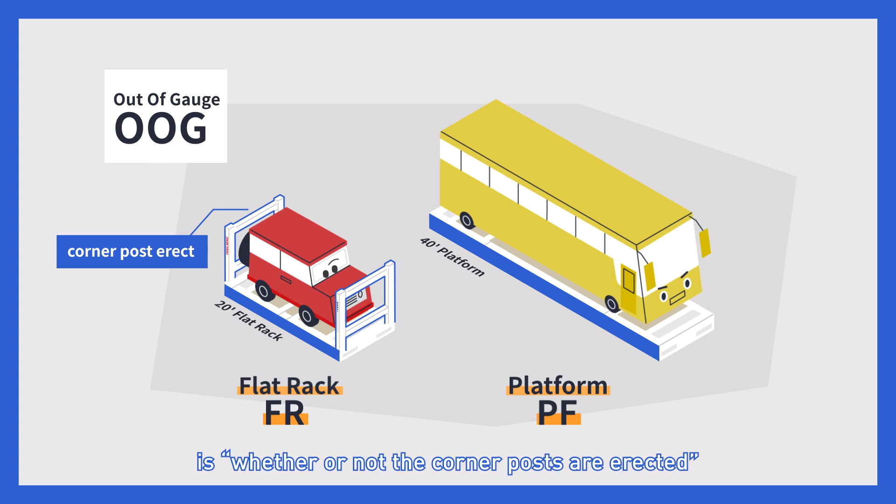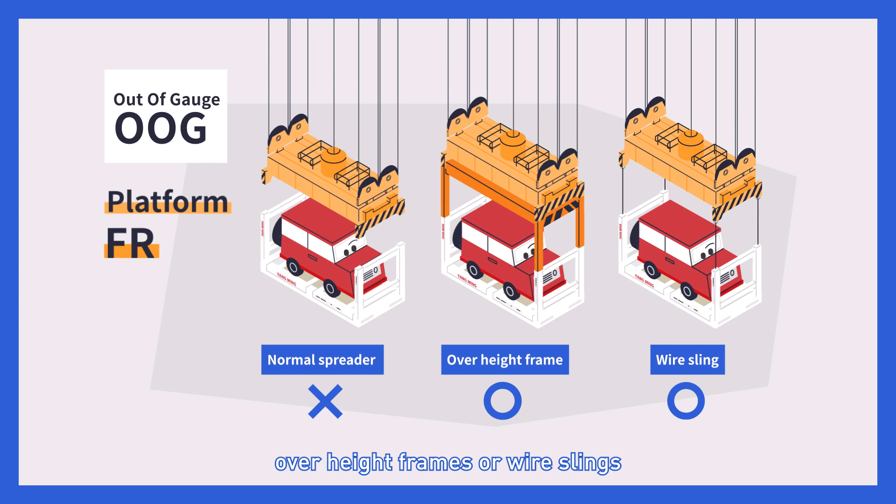These two containers are usually used for loading OOG cargo, since overheight cargo cannot be hung by normal spreaders. Overheight frames or wire slings are used for hanging this type of cargo. The rack in flat rack means shelf, which represents that the corner posts of the container are erected. The plat in platform suggests that it's flat, which represents that the corner posts are collapsed.

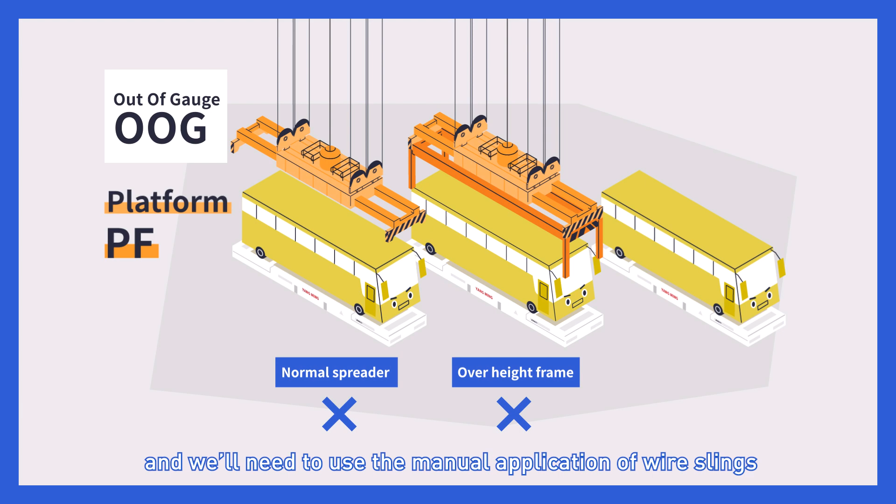In this situation, overheight frames cannot be used to hang the cargo, and we'll need to use the manual application of wire slings for hanging operations. Senior, there's something I don't understand. If using wire slings is troublesome, why are we still using platforms?

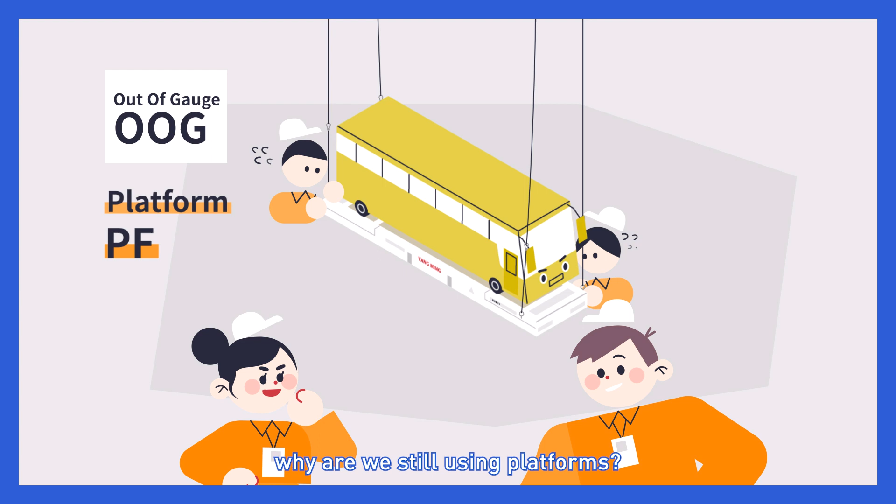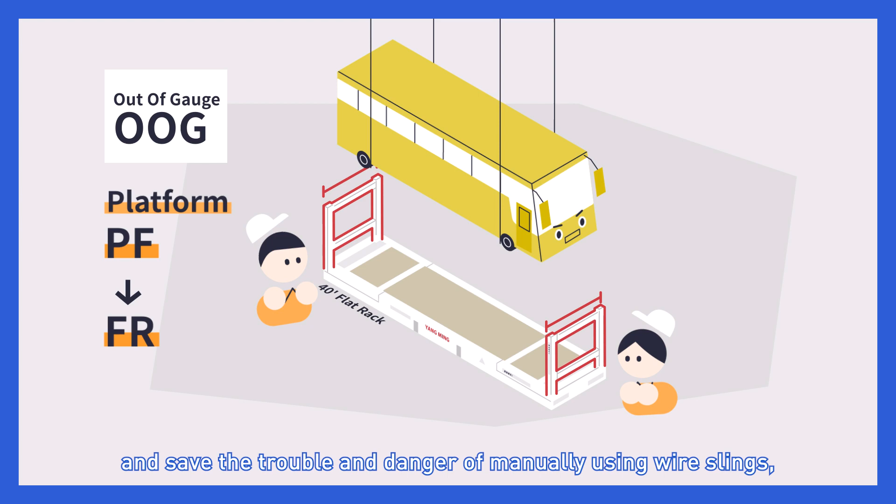Why don't we just erect all of the corner posts? Even though the erected corner posts allow us to use over-height frames for hanging and save the trouble and danger of manually using wire slings, the corner posts themselves take up space like a fence, and it will limit the dimension of the cargo. That's why the overlength cargo is not suitable for being loaded on the flat rack. It should be loaded on the platform instead.

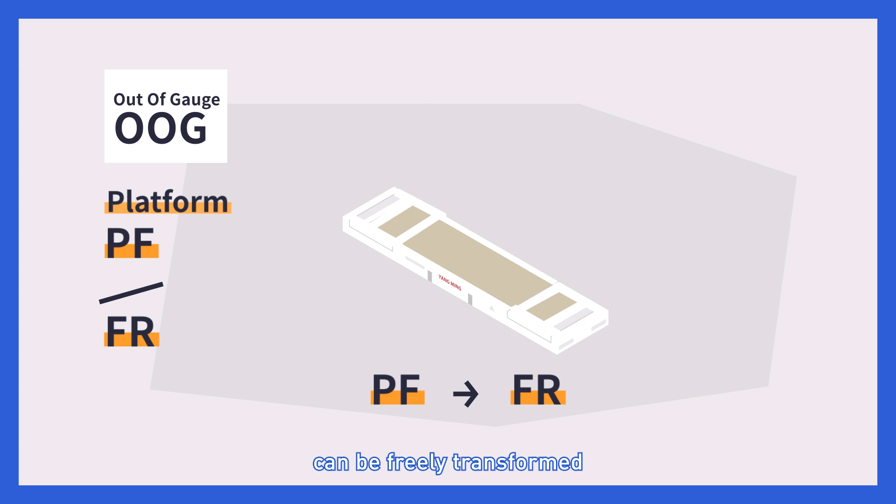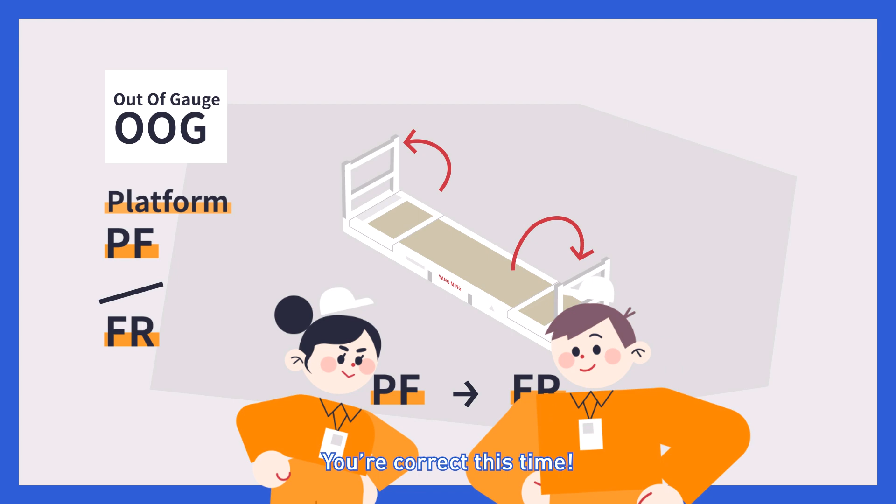By the way, Yang Ming's flat rack can be freely transformed into a platform or flat rack by folding the corner posts like this. Oh, it looks like a large foldable table in conference rooms. Exactly. You're correct this time. You really did a good job talking about the open top, flat rack, and platform for OOG cargo.

Thank you, Senior. I have to talk about them in detail so that our Yang Ming newcomers sitting in the audience can understand easier. The audience?

It's nothing. Anyways, let's talk about the other kind of cargo that cannot be loaded into general-purpose containers, which is BB cargo. When the dimension of the cargo is too huge or the weight is too heavy over the payload of a single container, not only can't you use general-purpose containers, but you also can't load as OOG. If one flat rack isn't enough, then put some of them together. This type of cargo is called BB cargo.

BB cargo will use multiple platforms or flat racks as base plates, as they must be hung separately. General-purpose containers, or OOG cargo, can use normal spreaders, over-height frames, or wire slings to simultaneously hang the containers and the cargo. The BB cargo and multiple base plates beneath the cargo can't be hung at the same time. Therefore, when BB cargo is being loaded or discharged, the base plates of the containers and cargo need to be hung separately. A suitable spreader should be used depending on the dimensions of the cargo.

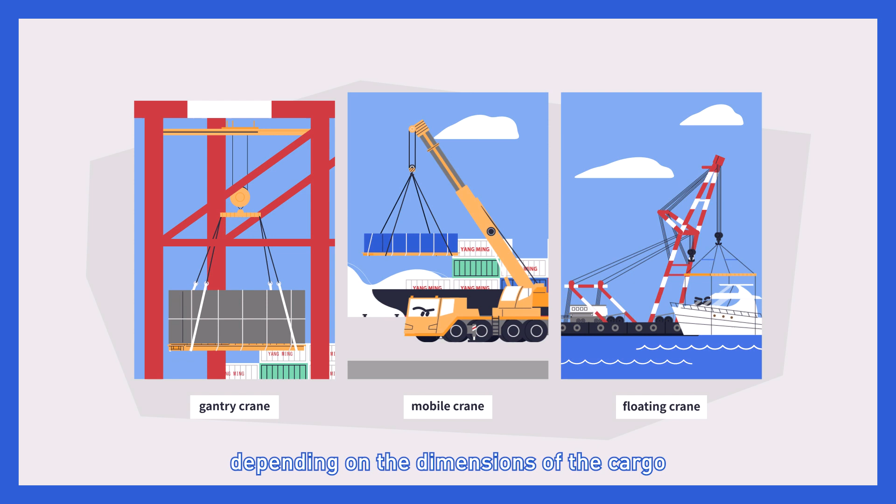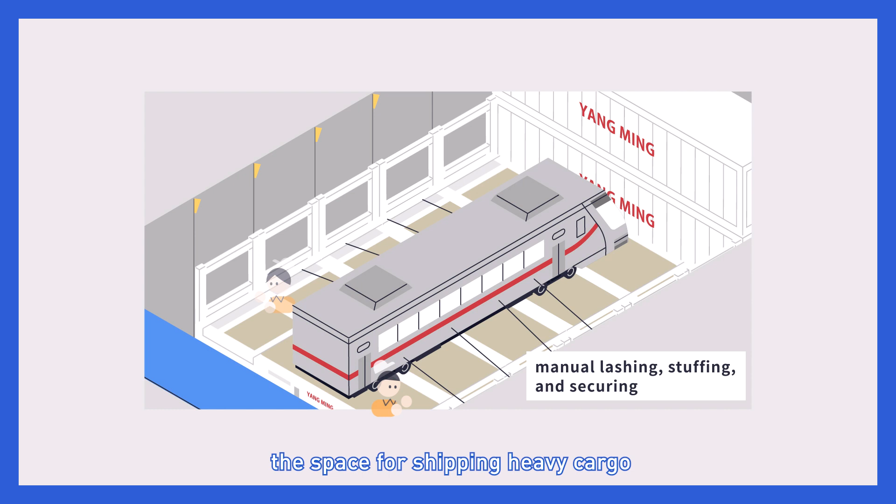Then, the BB cargo will be secured on the base plate after it is loaded onto the vessel, and the workers will secure the cargo. In short, the space for shipping heavy cargo also needs to be specially arranged, as they cannot be placed on top of general-purpose containers. That's finally all of it. I'll summarize everything one more time.

The two types of cargo that cannot be shipped using general-purpose containers are OOG cargo and BB cargo. The difference between the two is BB cargo needs multiple base plates due to being large and heavy. The cargo and container need to be hung separately. Only one container is needed for OOG cargo.

Based on the nature of the cargo, there are three types of containers to choose from: open-top containers, flat racks with erected corner posts, and platforms with non-erected corner posts. These three types of containers can be hung with over-height frames or wire slings. Not bad. Now, we'll talk about something more practical.

What does a Yangming container actually look like? What is the standard for over-height, over-width, or overweight cargo? What situations require additional expenses or result in the cargo being rejected? I'm not quite sure about that. You should come up and elaborate on that, Senior. Come on up. Dozo. Listen up.

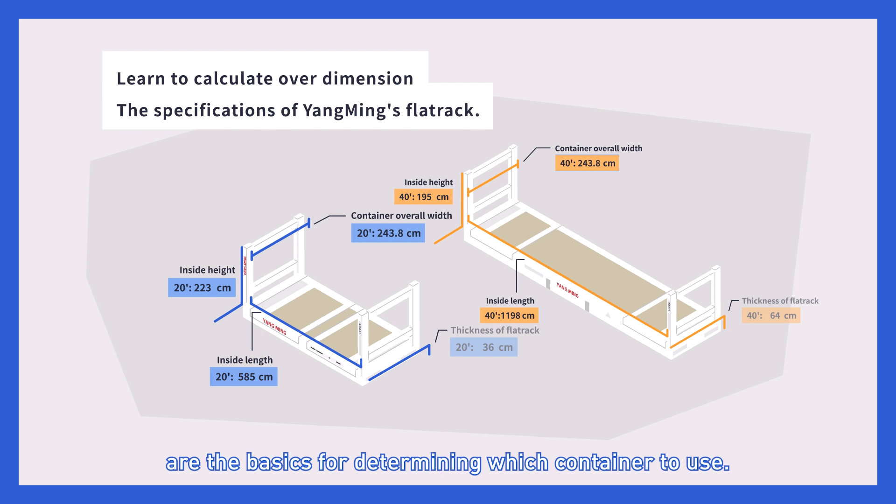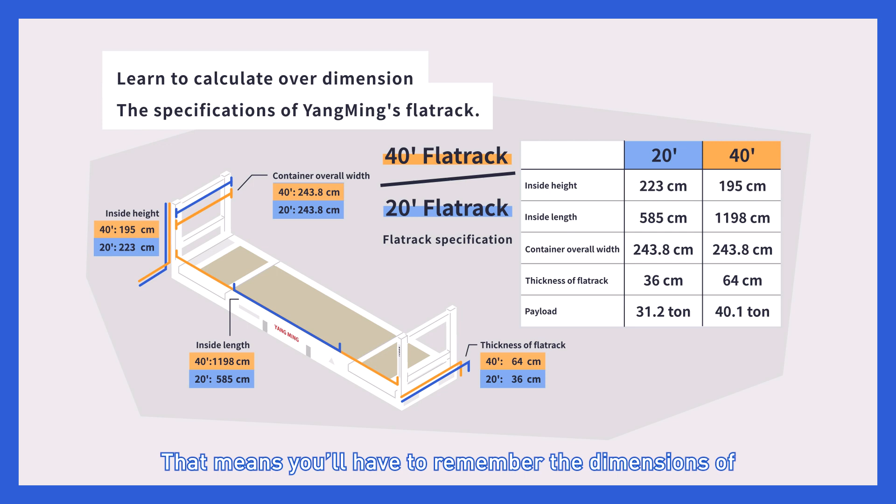The height, width, length, and payload are the basics for determining which container to use. Suppose you need to learn how to determine whether a cargo is over height, over width, or overweight. That means you'll have to remember the dimensions of Yangming containers. The external length of the base plate for Yang Ming Marine Transport's containers is divided into 20-foot and 40-foot.

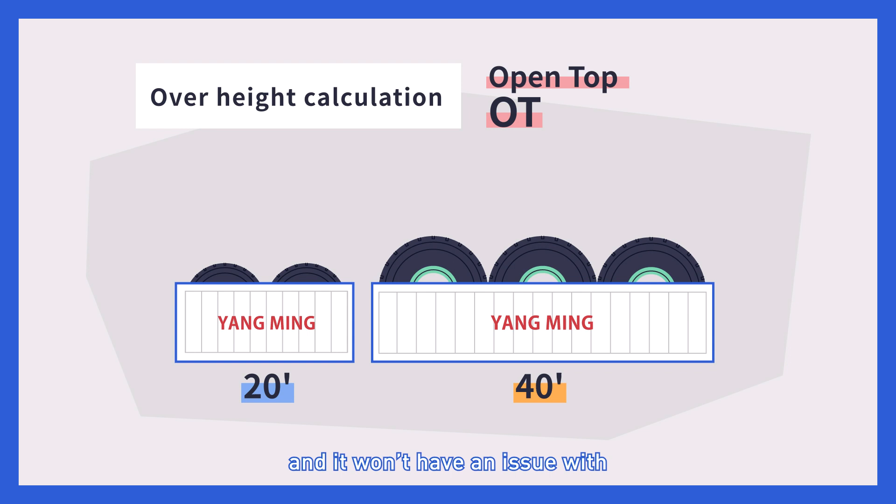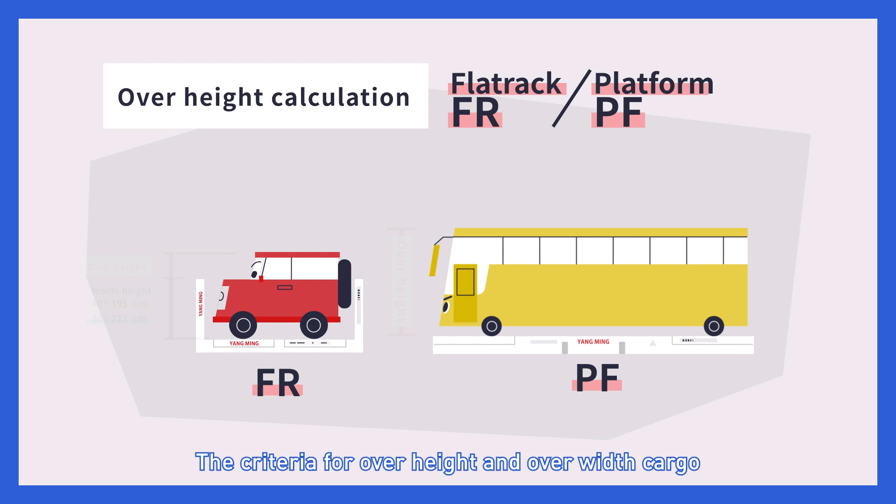If it is an open-top container, it will be enclosed with walls, and it won't have an issue with over-width cargo. The cargo is considered over height when the total height exceeds 234 centimeters. The criteria for over-height and over-width cargo for flat racks and platforms mainly depends on the actual loading dimensions inside the container.

The internal height of a 20-foot container is 223 centimeters, and the internal height of a 40-foot container is 195 centimeters. When the height of the cargo exceeds the internal height of the container, the cargo is over height. Senior, what about platforms?

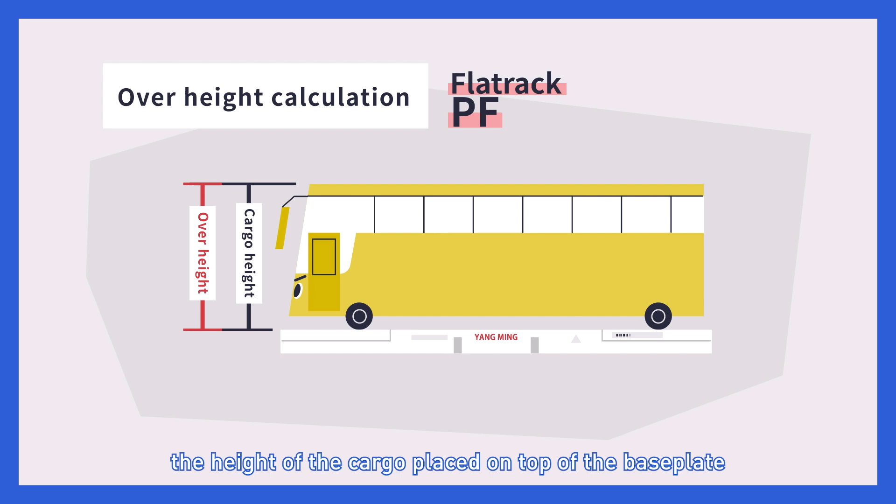Since platforms don't have erected corner posts, the height above the base plate counts as over height. Therefore, the height of the cargo placed on top of the base plate is how over height the cargo is.

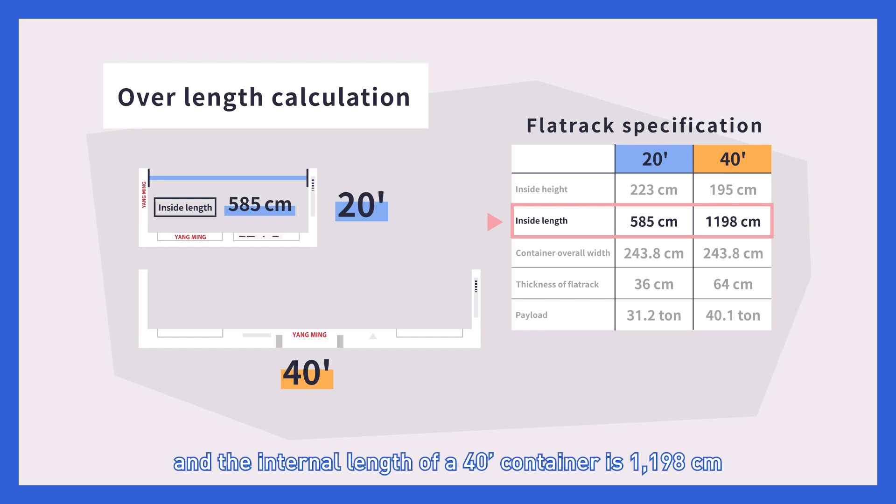As for the length, the internal length of a 20-foot container is 585 centimeters. And the internal length of a 40-foot container is 1,198 centimeters. Any cargo longer than 585 centimeters requires switching to a 40-foot flat rack. Any cargo longer than 1,198 centimeters requires switching to a 40-foot platform.

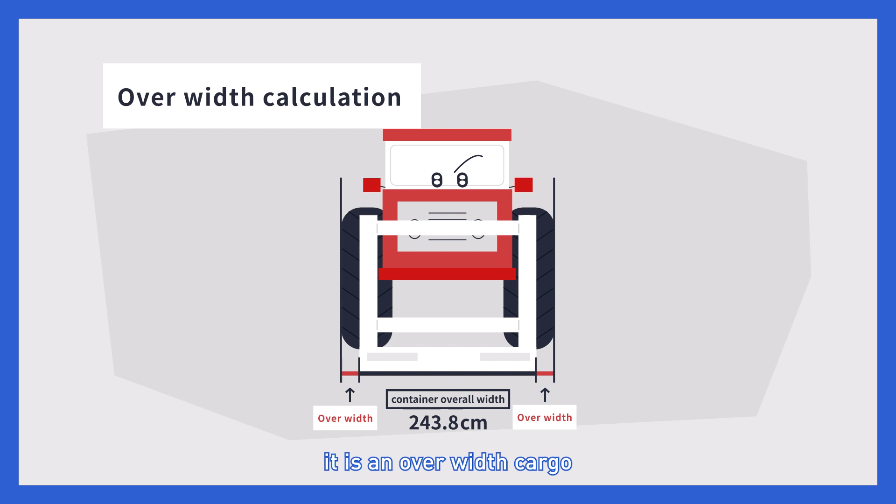Next is the width. The overall width of both the 20-foot and 40-foot containers is 243.8 centimeters. If the total width of the cargo exceeds that value, it is an over-width cargo. Pay attention here. The determination of over height and over-width cargo just mentioned refers to the total height and total width of the cargo itself. Therefore, the calculations also need to include the dunnage and lashing materials used to secure the cargo.

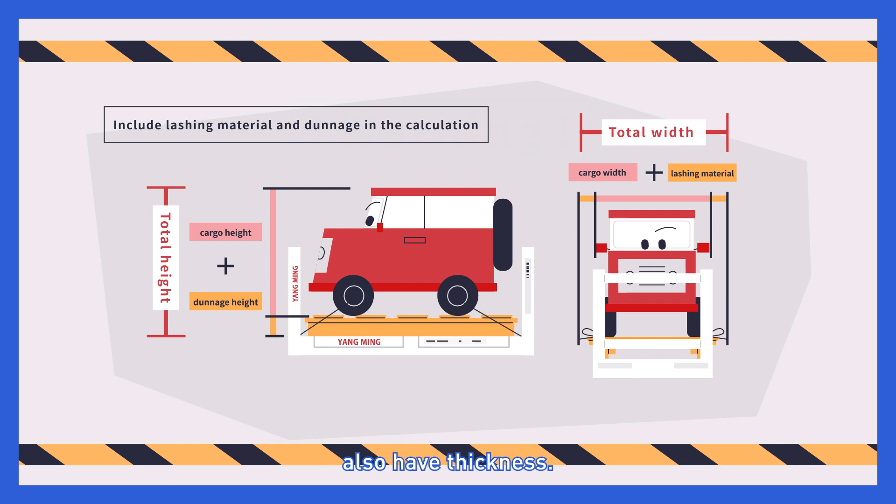For example, we add dunnage between the cargo and the flat rack to provide cushioning for the cargo. So, we have to include the dunnage to calculate if the total height exceeds the internal height of the container. On the other hand, the lashing materials used for securing cargo also have thickness. Therefore, the thickness of the lashing materials also needs to be included in the calculations of the cargo's total width.

As for payload, the payload of a 20-foot flat rack is 31.2 tons, and the payload of a 40-foot flat rack is 40.1 tons. Likewise, don't forget to include the weight of packaging and lashing materials when calculating the total weight. If it is overweight, the container will not be able to carry the load and it will increase the risk of an accident.

Another important thing related to weight: Yang Ming will not accept unbalanced cargo for safety reasons during the shipping process. That means the total center of gravity of the container cannot deviate from the center by more than 5%. If the center of gravity of each container is off-center, accidental overturning can easily occur when the cargo is in transit or when it's being hung or moved.

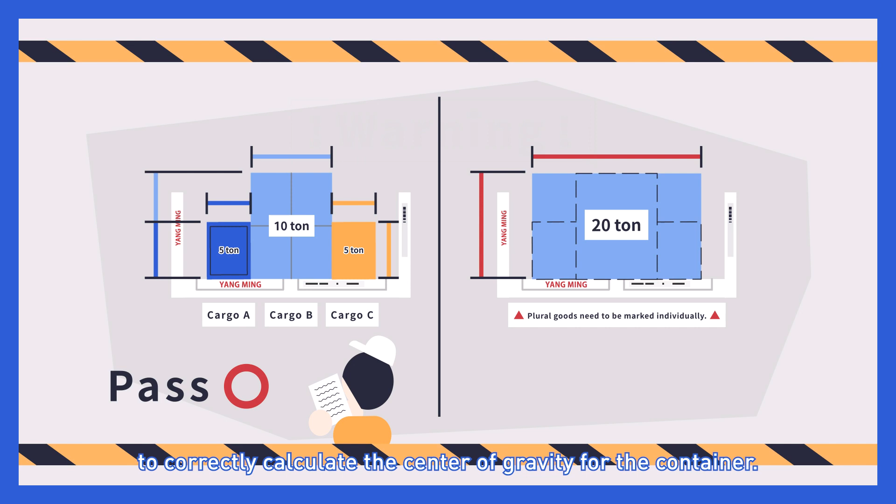Therefore, if there is more than one piece of cargo in a container, the weight and dimensions of each piece of cargo need to be clearly marked to correctly calculate the center of gravity for the container. If the center of gravity deviates, the cargo will be rejected to the client, and they will be required to properly relash and stuff the cargo.

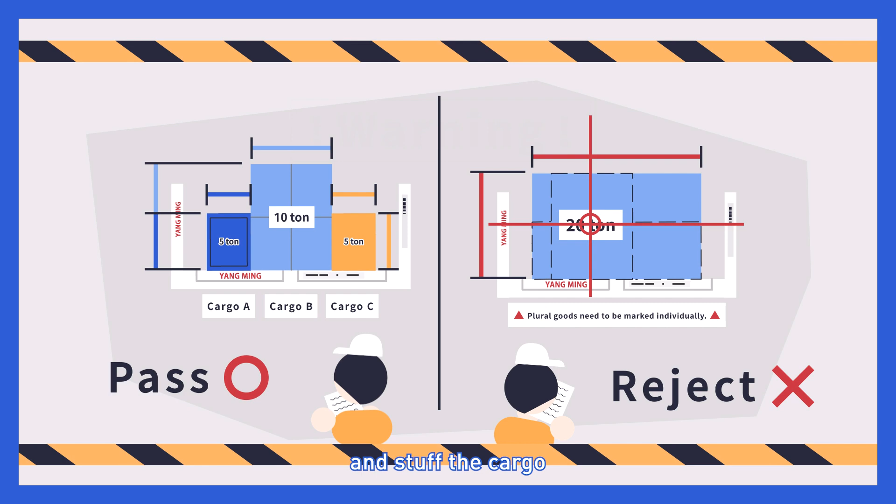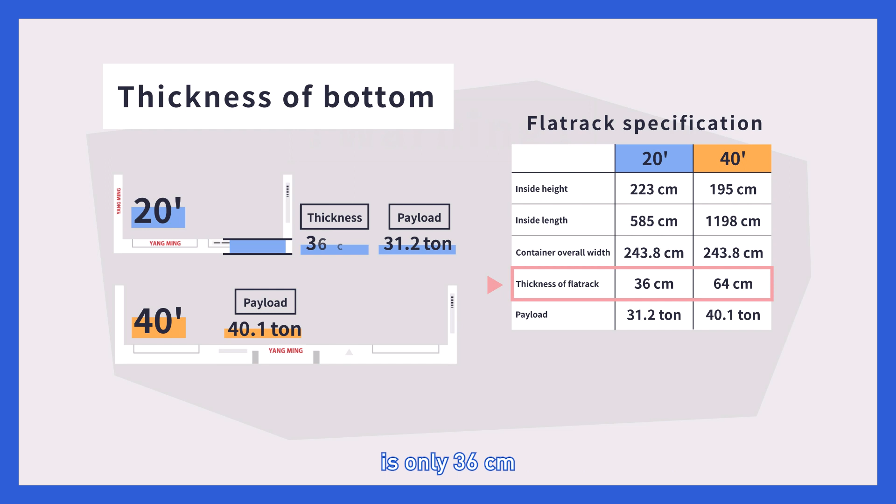Finally, the payload of a 20-foot flat rack is smaller than a 40-foot flat rack. In addition, the thickness of the base plate for the 20-foot flat rack is only 36 centimeters, while the thickness of the 40-foot flat rack's base plate is 64 centimeters. It's different. Have you memorized all of that?

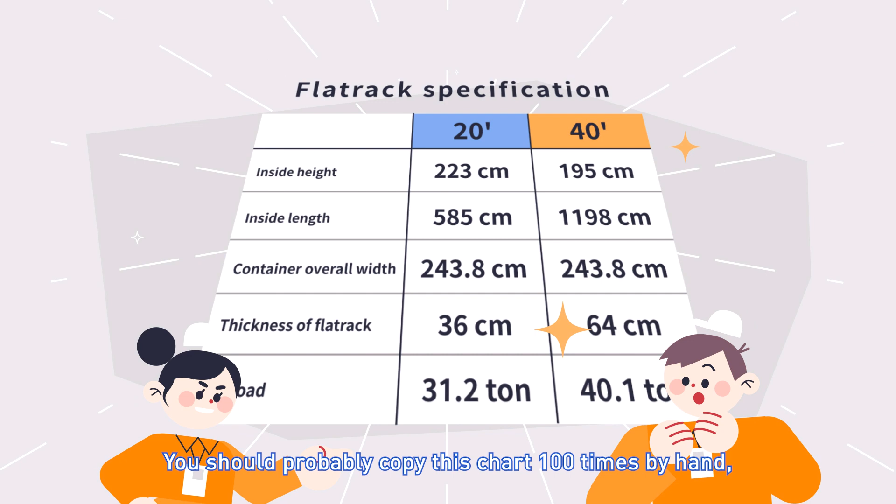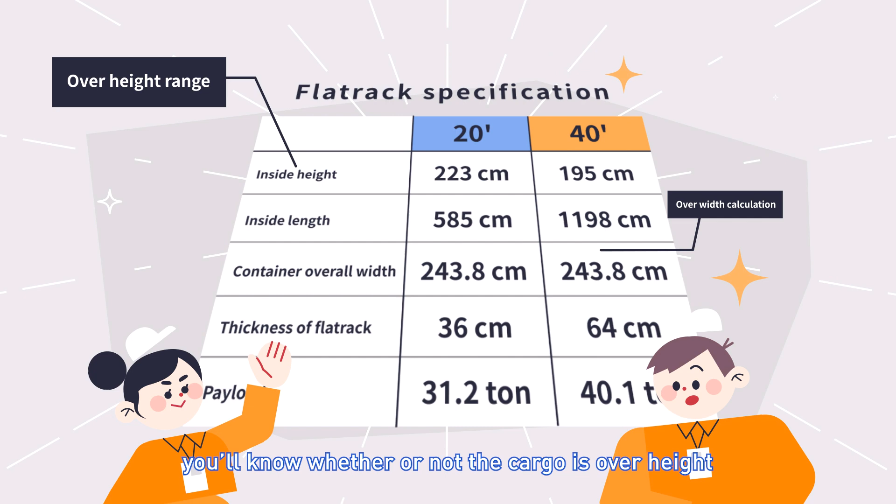223, 195, 585, 243.8. My goodness! There are so many complicated numbers! That's just the way it is. You'll be using these container dimensions every day. You should probably copy this chart 100 times by hand, or come up with a formula to memorize them. Whatever you do, make sure you remember these numbers. Then, you'll know whether or not the cargo is over height or over width. You won't struggle giving explanations when clients ask, why do I need to be charged additional expenses?

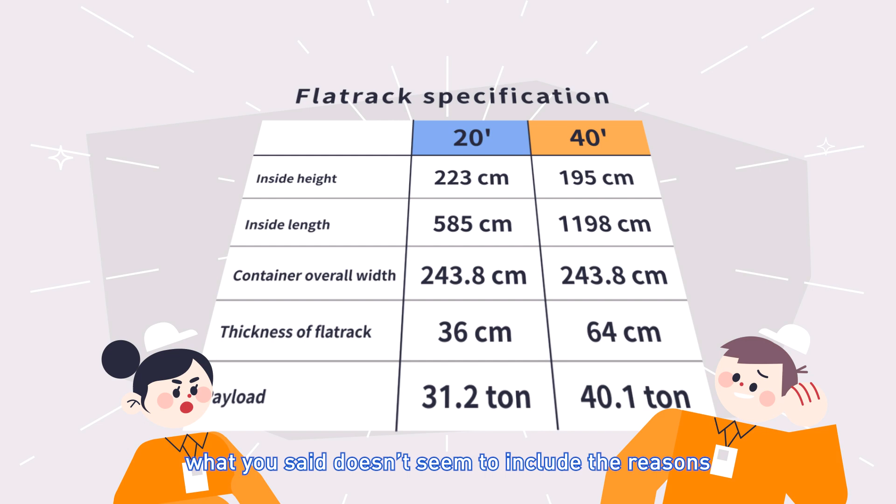Senior, what you said doesn't seem to include the reasons why clients need to be charged additional expenses. You told her the cargo is over width and cannot pass through the entry guide and needs to change to another space. If the cargo is over width, just charge them more for this. Why does she have to change the space, and what is an entry guide? You asked a good question.

We talked about the dimensions and weight of the containers themselves just now. However, in order for the containers to be smoothly loaded onto vessels or discharged onto the terminals, we also need to pay attention to various conditions such as the vessel structure, terminal regulations, and cargo conditions. The entry guide is an important component of vessels. What exactly is an entry guide? Follow me on board to see for yourself.